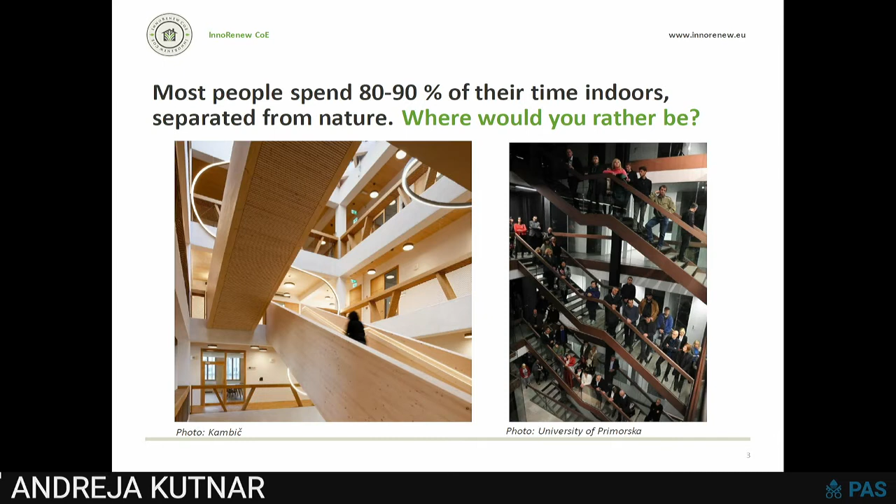Regenerative sustainability is an expression that maybe isn't heard enough, but when we are tackling climate change and how we want to preserve our planet, it's not only about reducing the environmental harm, but about how to create the positive impact. We need to go towards regeneration.

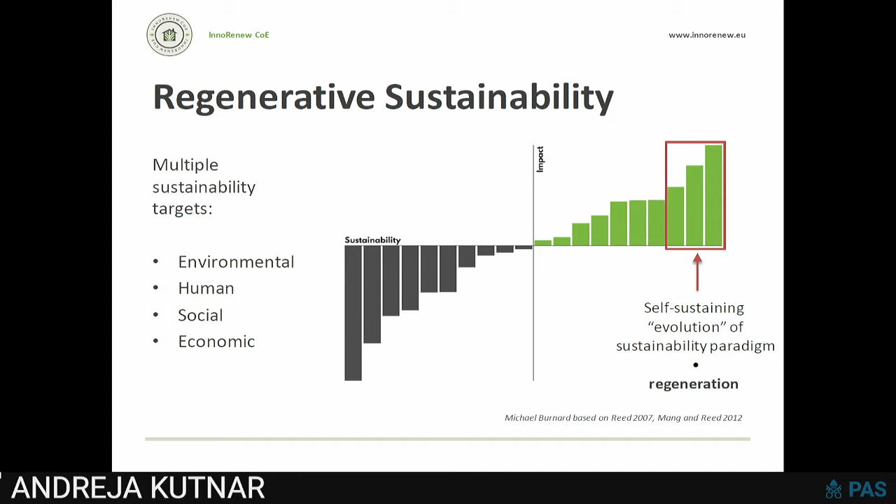When doing this in the built environment that we want to transform into a carbon sink, we should not forget that we need to include the new build as well as the older one, the building stock that already exists. In my belief, timber is the material that can be used for one and the other.

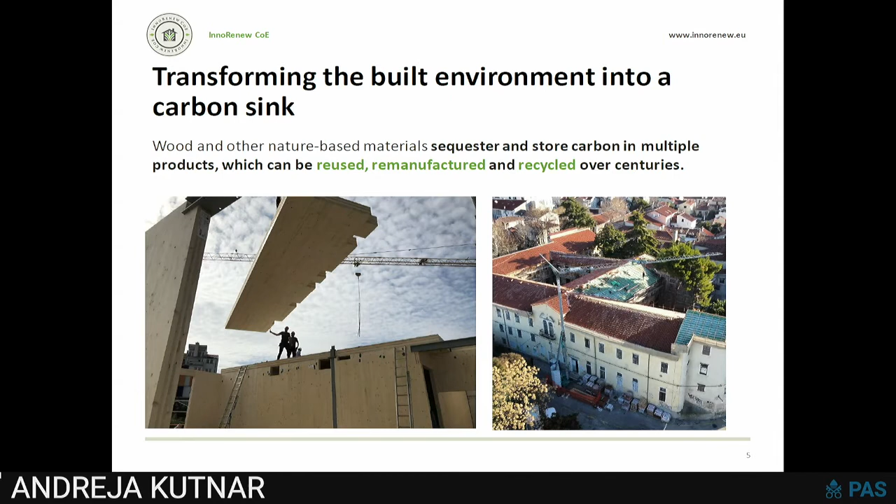It's an ideal material for so-called restorative, environmental, and ergonomic design, where we are not only achieving the sustainability objectives and goals, but we are also connecting humans to nature.

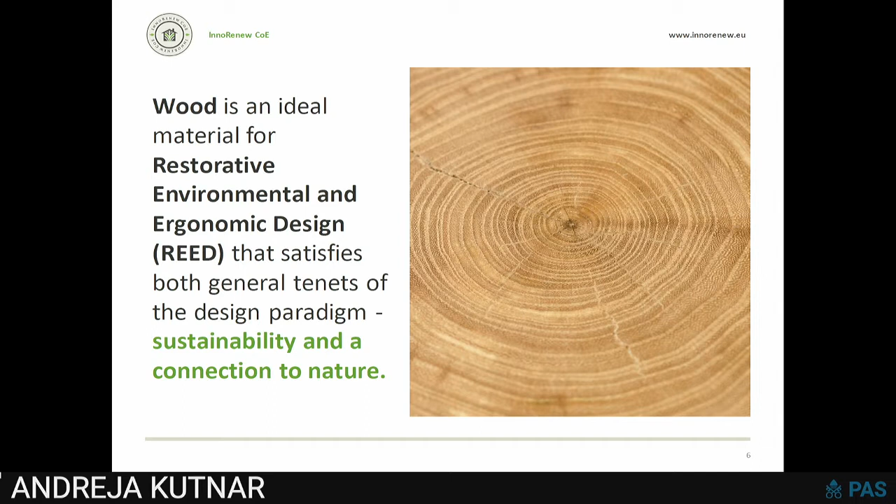Natural material like wood is a very important way to connect people to nature, also indoors. It has many impacts on us. It can provide health benefits, and also when we are connecting people to nature, it causes them to care about the environment.

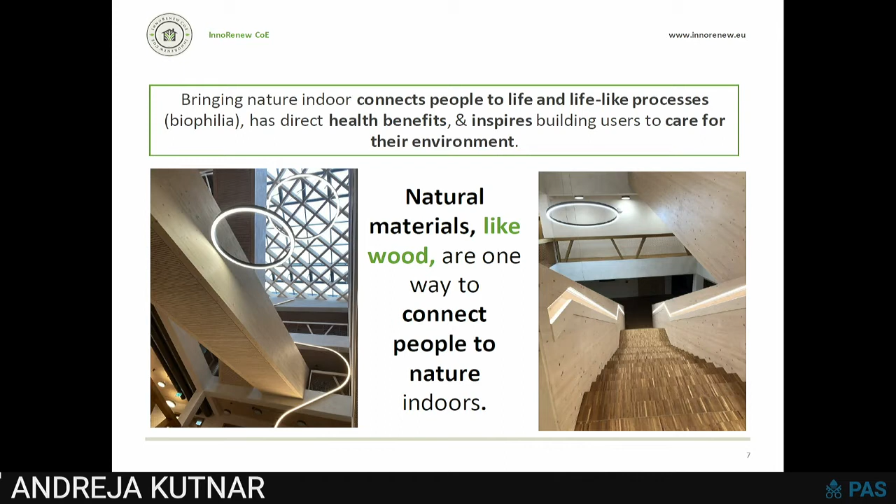But wood as a material is very complex, the result of nature. We can go from the forest to the trees to the boards, which we can see, but there is so much in the micro and nano structure of it. With a good understanding and knowledge about the material on these different levels, we can construct, I would say, the built environment of the future.

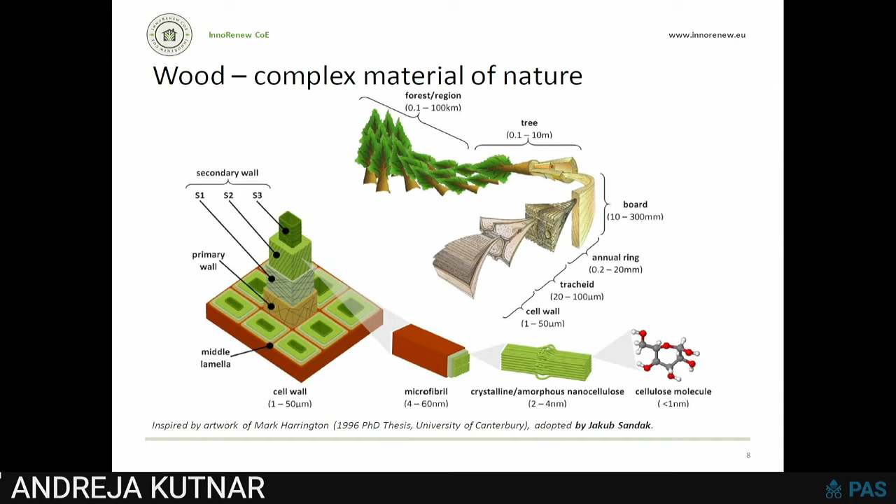And we are going into the sky, we could say. We can construct buildings, and every year we get a higher building. But that's not the intention, that I would say we need to go high, but the intention is to share with you that we are capable of making cities, our new urban regions, also with timber.

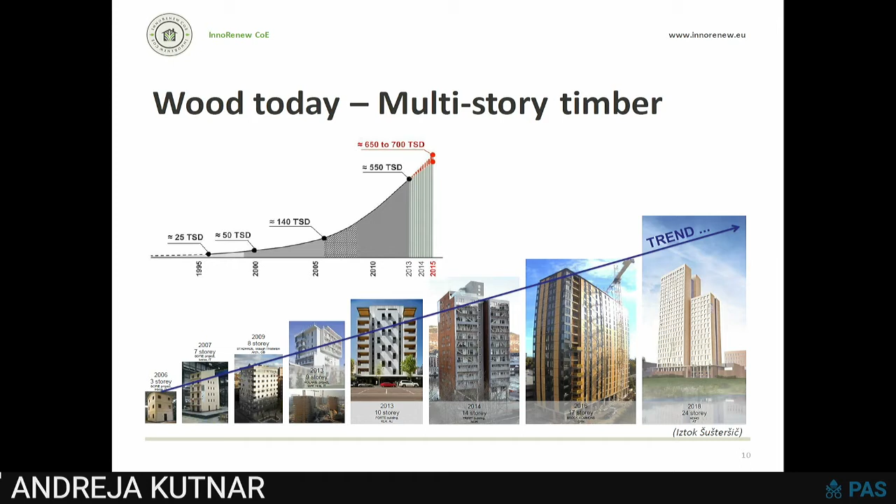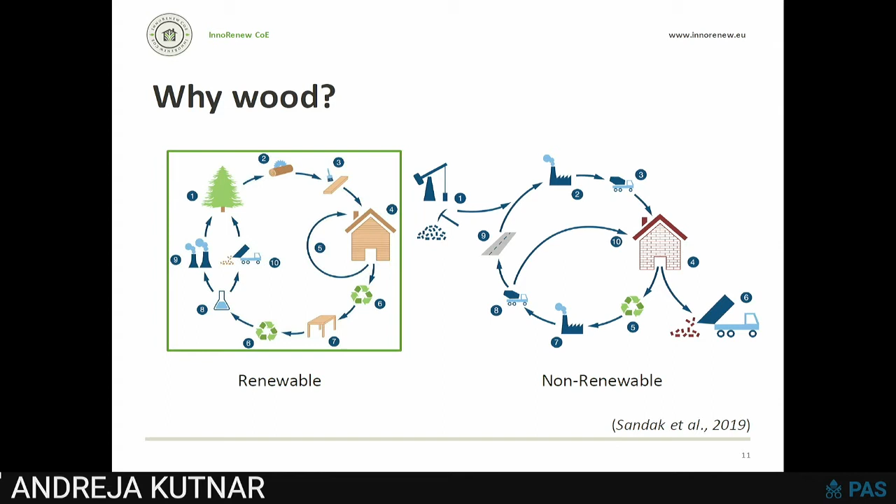Why is wood so important? It was emphasized today a few times already, but one aspect of it is that true circularity can be achieved. Renewable materials, we can go in circles, and with proper management of the forest, we are not taking anything from nature.

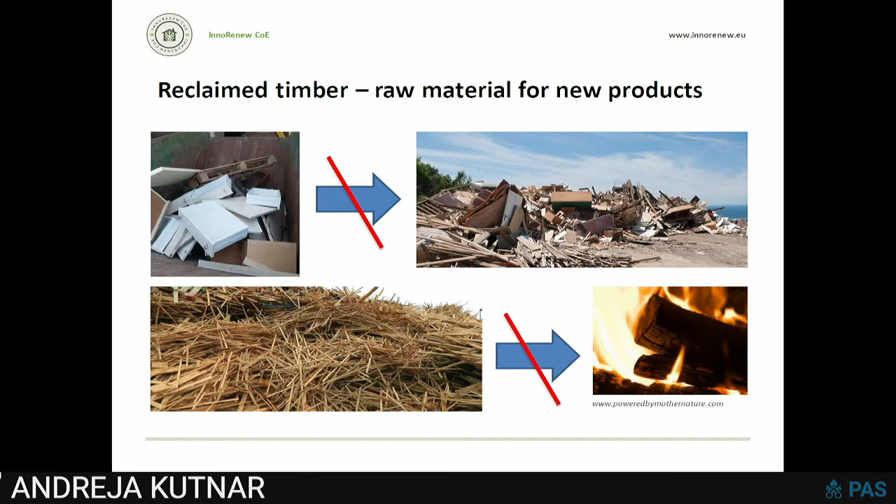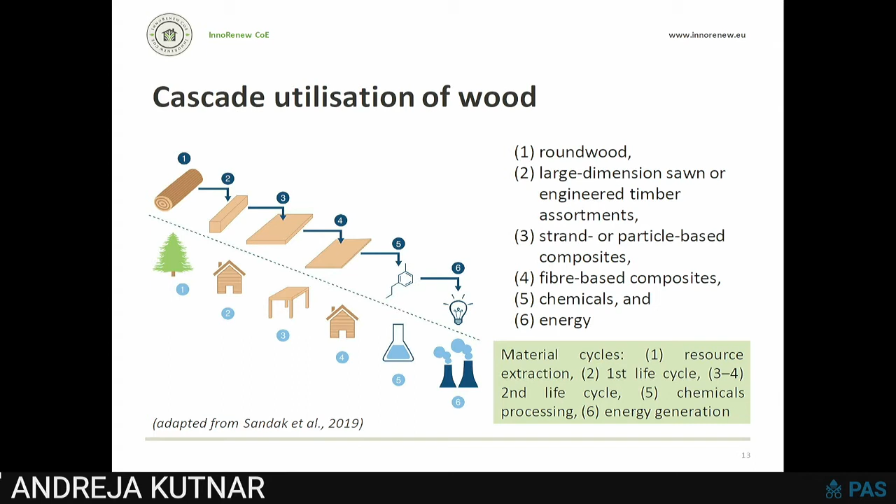Today we often see at waste collection facilities that wood as a material, when it comes to the end of the life cycle, is just used for energy. I would say, let's avoid this. Let's encourage one another that we are not burning the wood, but that we are using it in a cascade way, going from the boards in large dimensions, in the next cycle going down to the fibers, making engineered wood products out of it, and only at the end using it as energy.

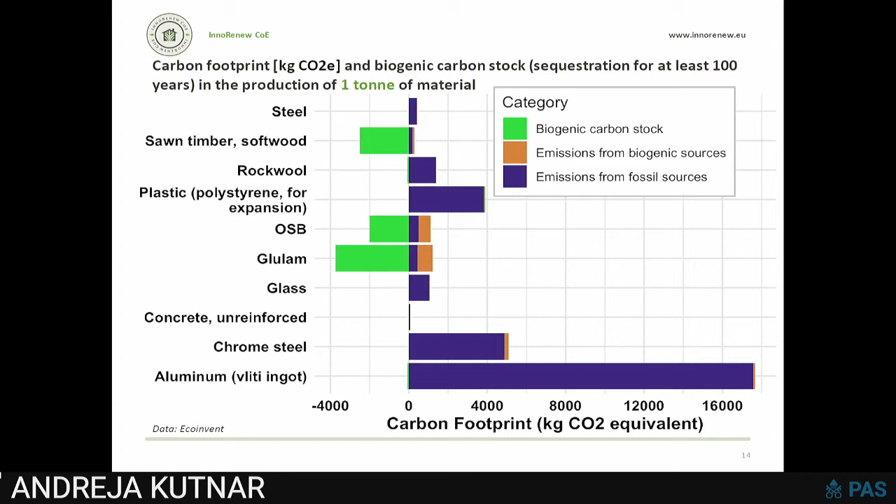We've often been discussing which material is proper, and the fact is that we need to have the proper choice of materials for proper use. But still, the carbon stock in wood-based materials is the reason why we need to go towards cascade utilization of wood. We need to use more wood, I would say, and I hope that there are many of you around who agree with me.

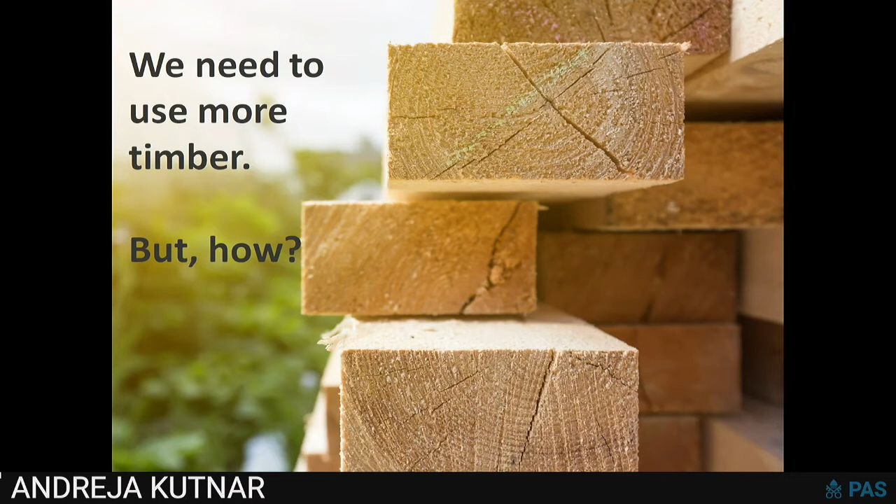But how? My strong belief is that an interdisciplinary approach and modern research fields need to be combined with sustainability and sensible use of natural resources, and in my case of today's presentation, wood.

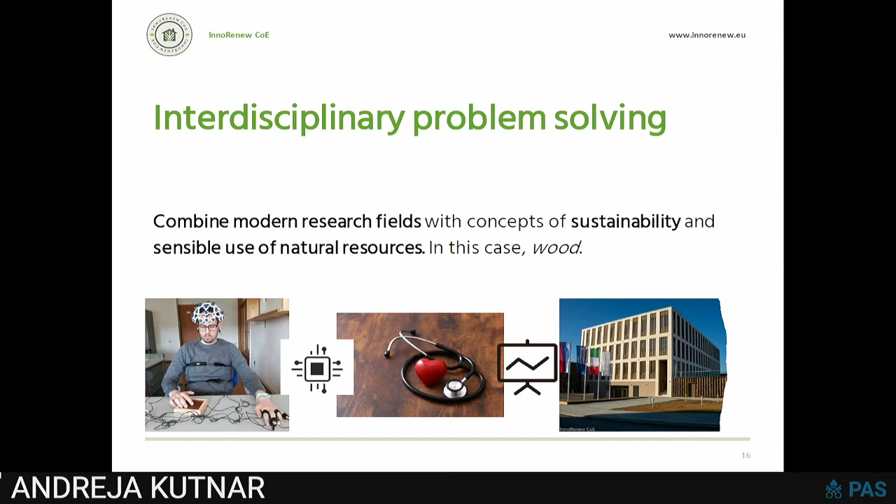We need to be, of course, also applying the modern technologies. VR can be one of them, and include people in their designs and show them before they make a decision where they want to live, how their home will look like.

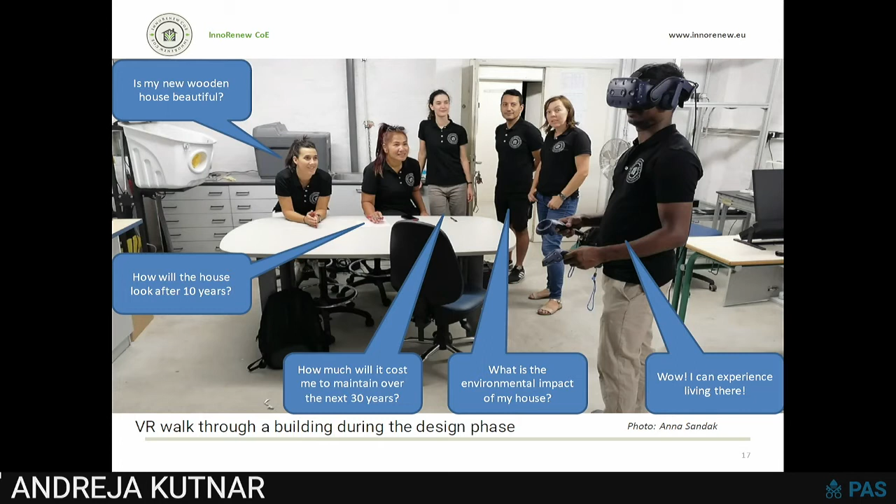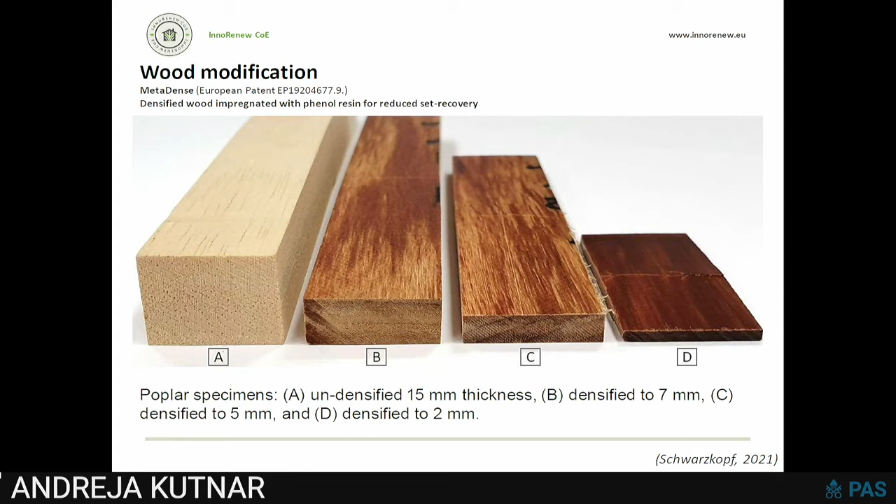But we should not forget that the planet is changing, and also new timber species that should be utilized in the built environment are among us. By knowing wood as a material, we can modify it, we can change it with the needed properties for certain applications. I have here an example of densified wood that was developed in our laboratories, and we can turn poplar, fast-grown plantation wood, into construction material.

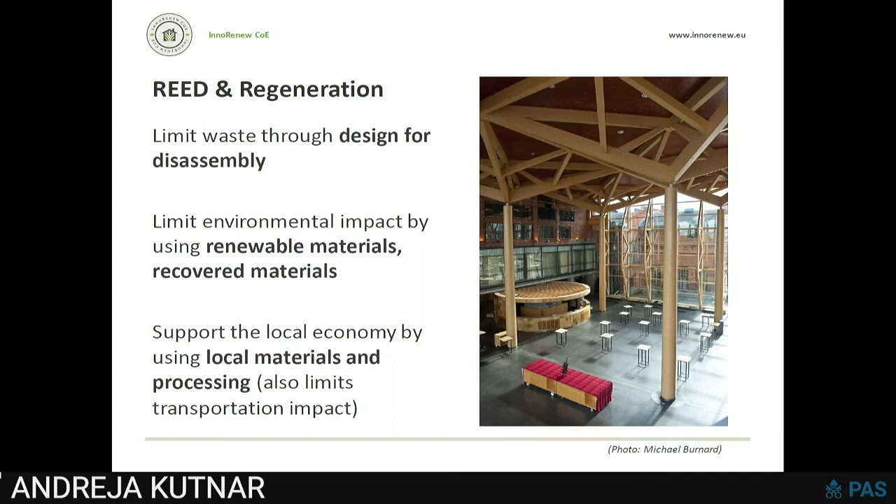I could go on, but I think it's very important to come back to the built environment and human. Restorative environmental and ergonomic design is bringing the person back into the center, looking at how the built environment is impacting us. And as was emphasized today, local materials. In Europe, I believe we have enough wood that we can use wood as the one we construct with. Design for disassembly is something that will enable us, after the first cycle of a building, to use the timber, the engineered wood product, again in a new way and in a new built environment.

At this, it's important that also in buildings we are connecting people with nature. One way is with the material, but we should not forget also the natural light, the sounds of nature, and I could go further into the importance of this.

But at the same time, we need to be aware that constructing with timber also requires that we are very careful, and we still need to learn. Therefore we need demonstrations, we need to monitor, and we need to apply modern technologies for how we can actually monitor the performance of buildings. Sensoring of buildings is one way that today can assure we will know exactly when a building needs to be refurbished, when it needs to be repaired, and how it is behaving in different climates.

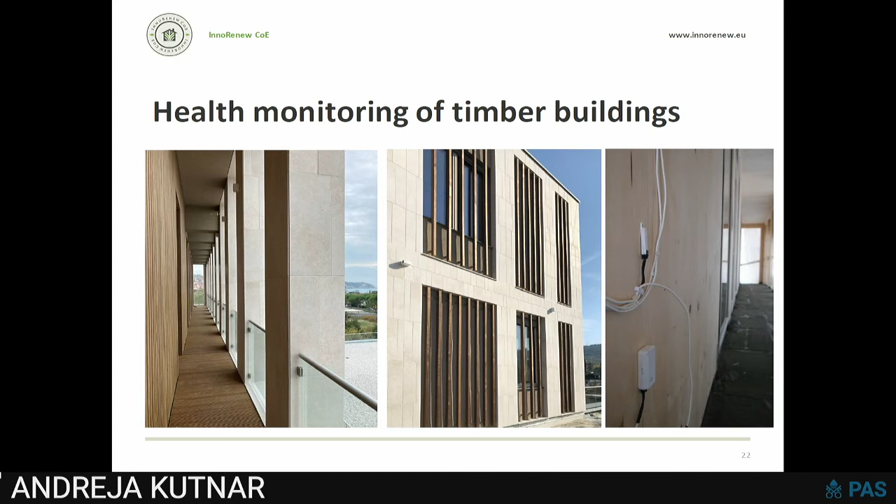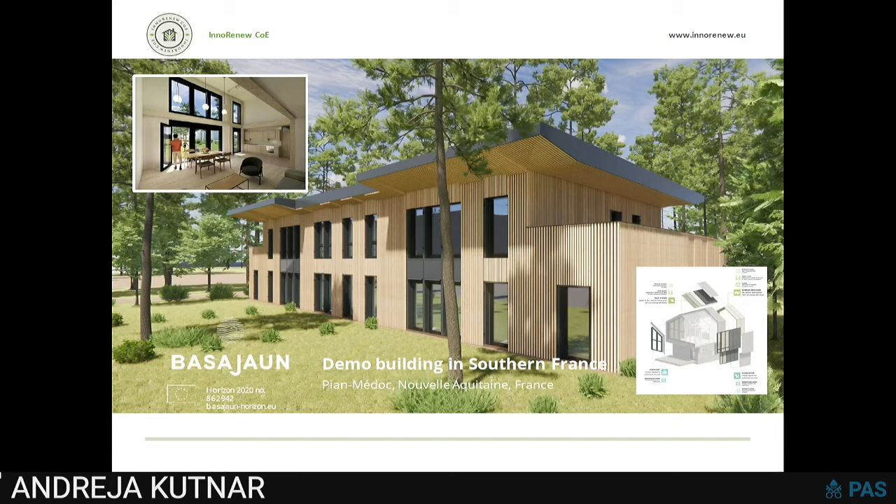There is also one project currently underway in France, a demonstration building, and it's not my intention to go into detail of this demo house, but I want to encourage everyone - let's make demonstrations and let's educate one another.

And to come back to what I mentioned at the beginning, it's not only new build, it needs to also be the old building stock that we have, especially in Europe. Here I have an example of an old Servite monastery that is a cultural monument of national importance in Slovenia, and we are currently renovating it.

I allowed myself to bring a few brochures that are outside the room, and you're welcome to take them. There is a kind of treasure of knowledge from the past in this building that with modern technologies we can record, and we can pass it to new generations.

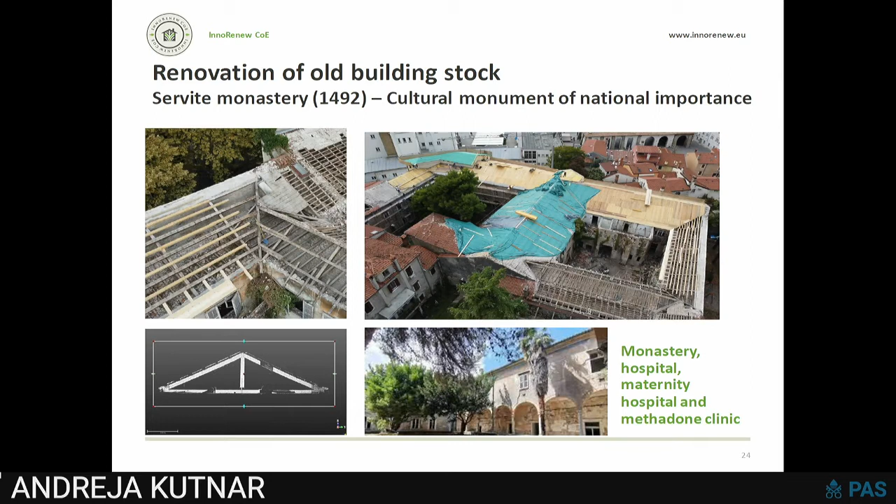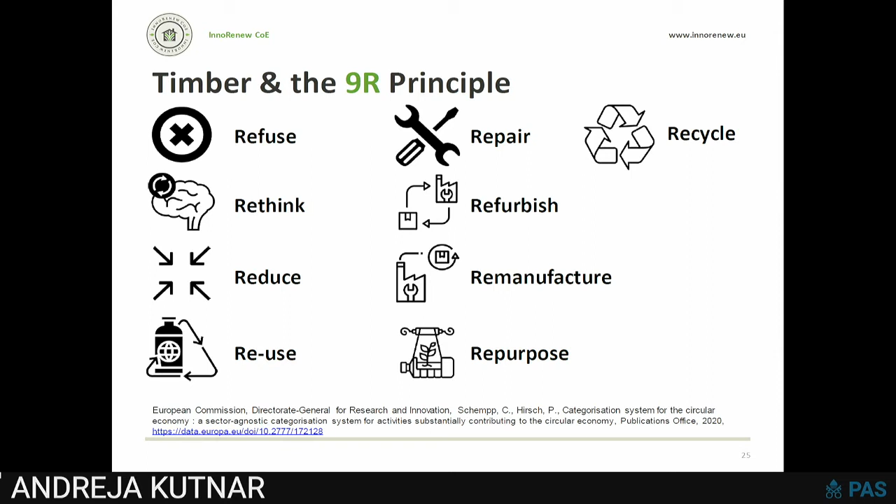For the end, I will just pass you through the 9 R's, the circular economy concept, and how timber can be in place in this concept of 9 R's.

Refuse. So we should not always want more and more. Sometimes we need to make a decision that certain materials are not proper. And when it comes to wood, we could say, let's not use too much of it. Let's make proper decisions.

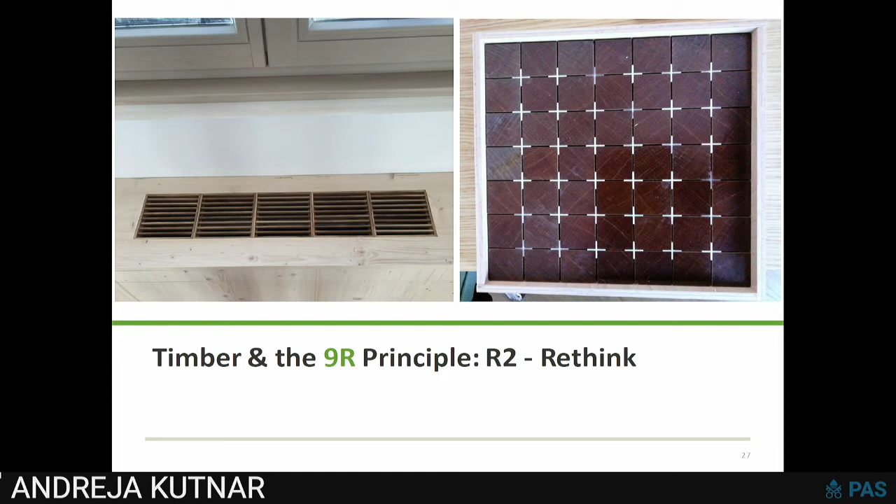Rethink - why not make products that other materials are currently used for? For example, wooden tiles or radiator grids that can be produced out of wood when we understand how we need to modify it so it will perform for the purpose we are making it for.

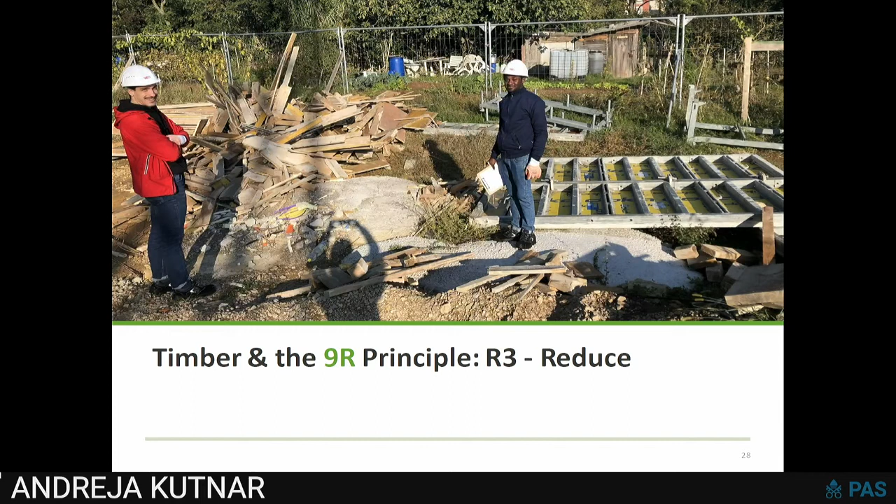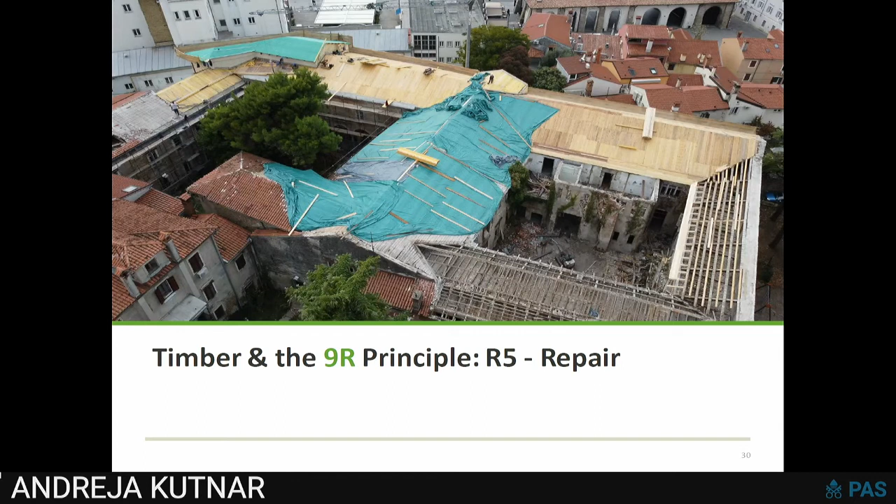Reduce. When we are constructing, for example, there is waste, also waste wood created. Let's reduce it, and what is created, let's reuse it for a certain purpose. Sometimes we go too much towards the easy way, but it's important that we also go towards repair, taking on the challenges with the purpose of creating the built environment together, for our better well-being.

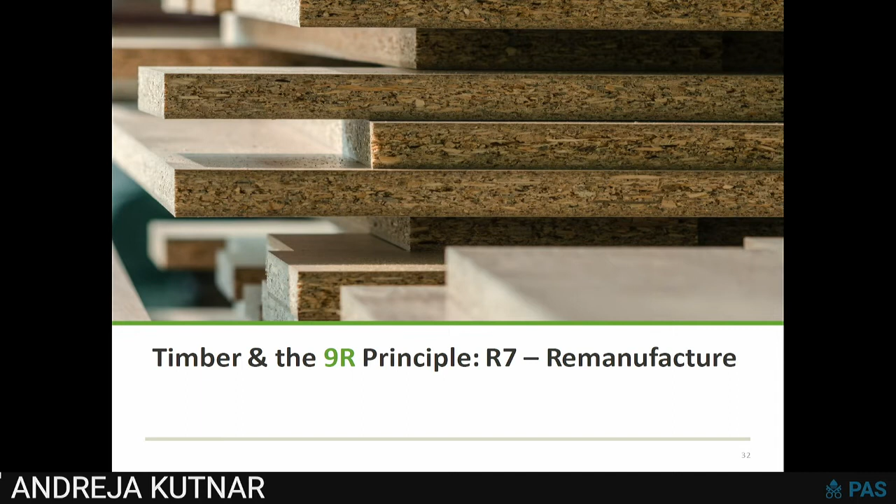Remanufacture - in cascade utilization, waste wood can be used in, for example, particle boards. Repurpose - we can always find another use of the material that we are using. Recycle - again, I could go into engineered wood products where fibers are being used, and we do not need to just burn the wood.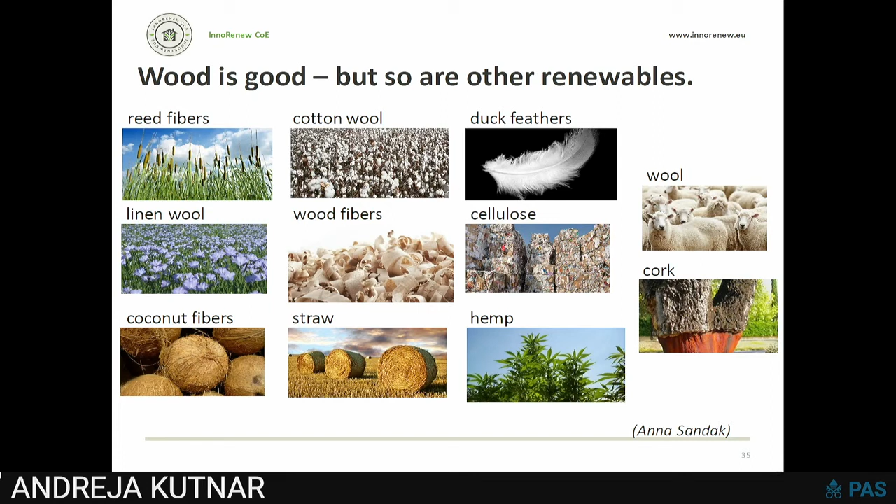Of course, at the end, we shouldn't forget about all other renewables that exist. As stated, I wanted to focus on wood, but at the same time, I want to emphasize it's not only wood that is important.

And what is, in my belief, the need for the next step? How to make more wood. I believe it's important to accelerate knowledge transfer to co-create a beautiful and sustainable built environment for all.

InnoRenew Beyond is how we are calling this project at our institute, where we want to learn how to transfer all the knowledge that we have, the scientists that are discovering new knowledge, and how to pass it to society and economy. We are not the only ones. Many research institutions and universities exist around the world, and only together will we achieve the accelerated transfer into the real world of scientific knowledge.

For the end, let me invite you to a conference, Wood Rise, that will be held in Slovenia, in Portorož, this September. We also have some of the speakers from today's event with us, and let's together discuss taller timber buildings, and especially how wood can be used in the renovation wave of our cities. Thank you very much, and thank you to the team that is behind.